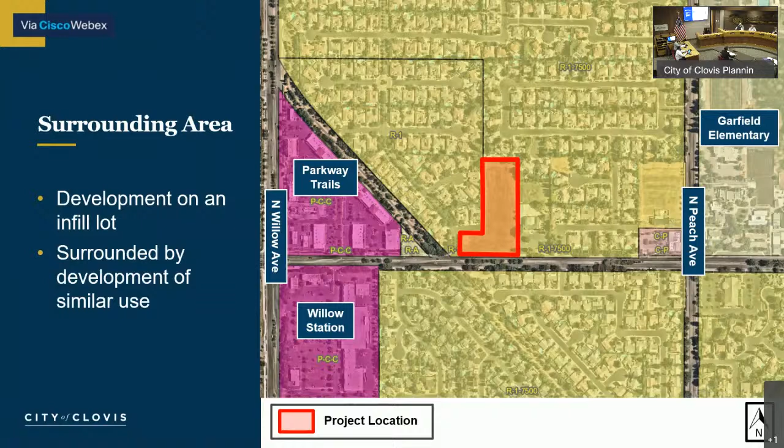The subject property is zoned R1 7500 with a general plan land use designation of low density residential. The proposal of a 10-lot subdivision on the 3.55 acres would result in a density of 2.81 dwelling units per acre. The general plan allows for up to 14 lots to be on this site, so the proposed use is well within the permitted density range and even at the lower end of it.

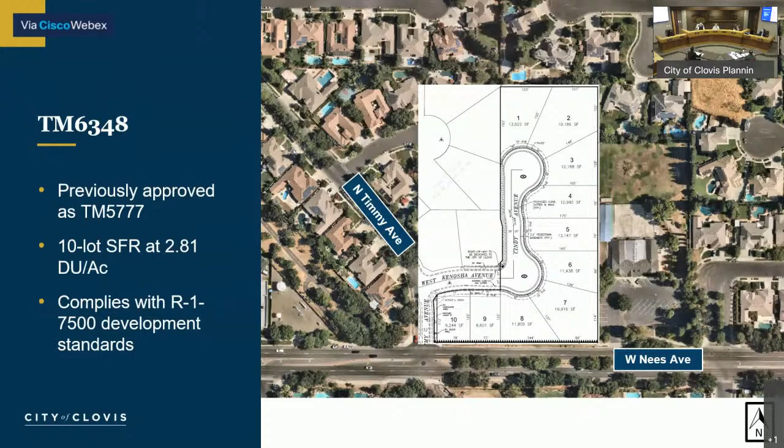Now, would they have to replant those trees somewhere on the property if they were to move them or remove them? That is correct. They would have to get a tree removal permit to remove any trees on the site, and that includes an arborist report and a replanting plan. And it is their intention to save what they can, but for what they do have to remove, they will need a permit. And the palm trees will fall under that same? That is correct. Okay. Is there any way to remove the palm trees from it? I would hate to see them have to put the palm trees somewhere. Okay. Any other questions? Okay, we'll now open it up to the floor.

And the applicant, would you like to say something? No, let them turn it on there for you. There we go. Am I on now? Yes, you are. Good evening, Mr. Chairman and members of the commission.

My name is Gary McDonald, and we're very pleased to be able to acquire this site. In the past, we've built several hundred houses in Clovis, and they've not been as high quality as we plan on building here. The homes are going to be larger, and the lots are large enough in some cases to have accessory dwelling units. So we'll probably be making applications for accessory dwelling units on some of these lots. We are in agreement with the staff's report and ask that you approve this for us. We're ready to move forward as quickly as possible to build these out.

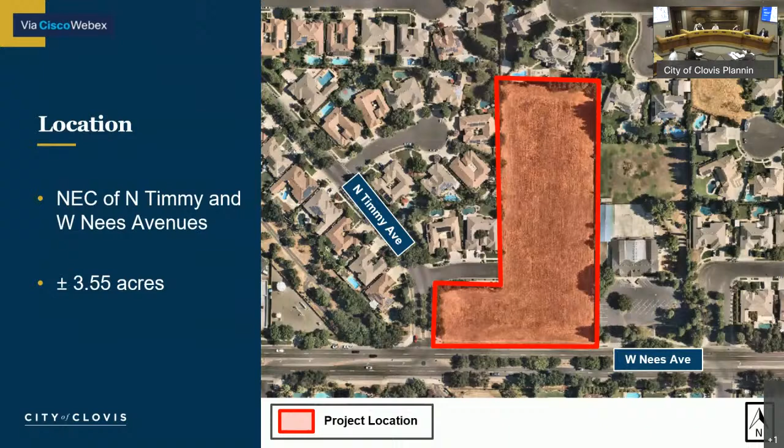Item number 3, consider items associated with plus or minus 23 acres of land located at the northeast corner of Nees and Minnewawa Avenue. Jeremy Vander Linden and Brad Bell, the Well Church applicant's representative, the Well Community Church, a California nonprofit religious corporation owner. Item A is consider approval of a request to approve environmental findings of a mitigated negative declaration for rezone 2020-005 and conditional use permit 2020-006.

Item B, consider approval of R 2020-005, a request to rezone plus or minus 23 acres from the RA single-family residential very low density zone district to the Clovis R1 7500 single-family residential low density zone district. Item C is consider approval of conditional use permit 2020-006, a request to approve a conditional use permit for a church use. Staff? Good evening, Chair Hinkle, members of the Commission.

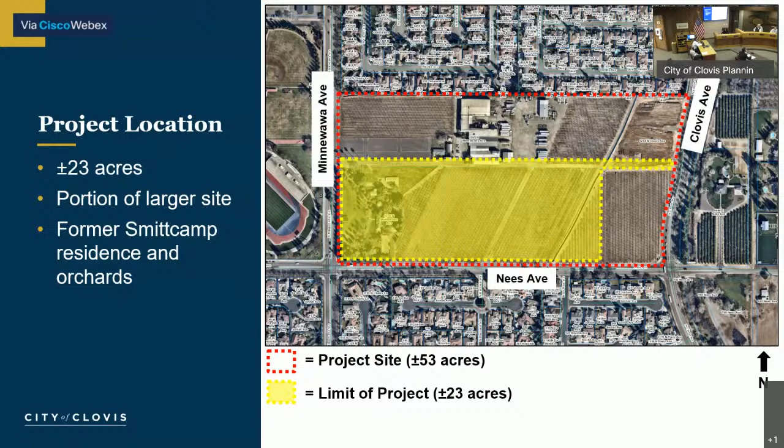So the project is located on the northeast corner of Minnewawa and Nees Avenue, as you see here. The project itself would occupy an approximate 23-acre portion of a larger site. The larger site you can see is denoted in red. It's about 53 acres total, but the project itself for consideration tonight is about 23 acres of that. A lot of you may know it as the former Smittcamp residence and or orchards, so that's where it's going to be.

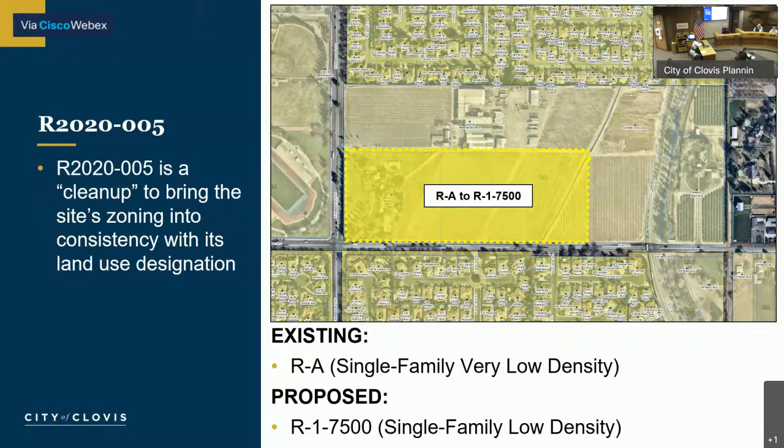Rezone 2020-005 is a rezone request to go from the RA, single-family very low density, to R1 7500. Really, this is just a cleanup action. The current land use designation here is low-density residential, and to bring the zoning into consistency as part of this project, that's the purpose of that. The reason why R1 7500 was selected is that's just what's surrounding in the other areas, so that's what's consistent. But obviously, this is for a church use, so that's just a cleanup action.

CUP 2020-006 is for a church use. Church services would occur on Sundays at 9, 11, and 5, as well as weeknight services Monday, Wednesday, and Thursdays from about 6 to 8:30, depending on the day. Childcare services would be provided only during church events and services.

So I have a site plan on the next couple of slides that will show where the daycare or childcare center is. That's not intended to be any kind of other childcare. It's only open during service events. Other events included in the CUP would be typical of churches, weddings, funeral services, Bible studies, and other events that you might see at a church-type facility. They will also include recreational fields for their use.

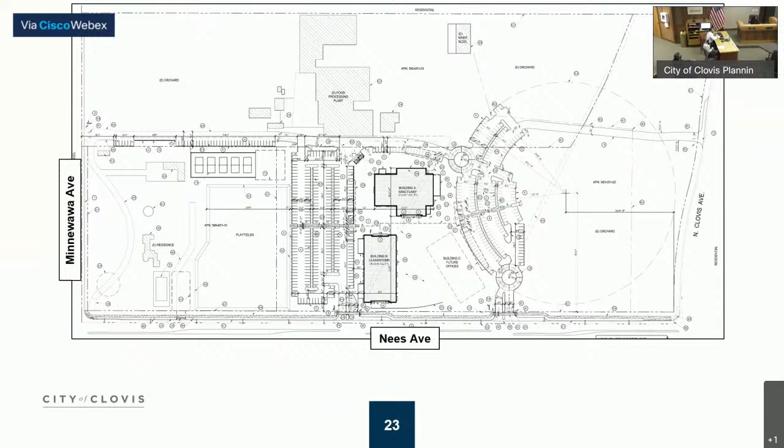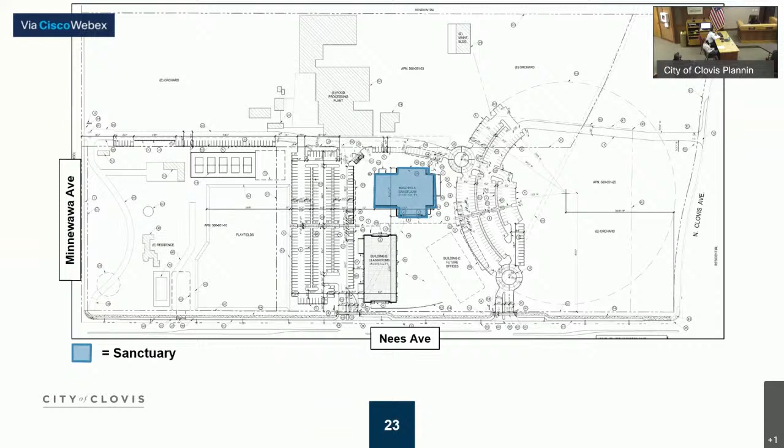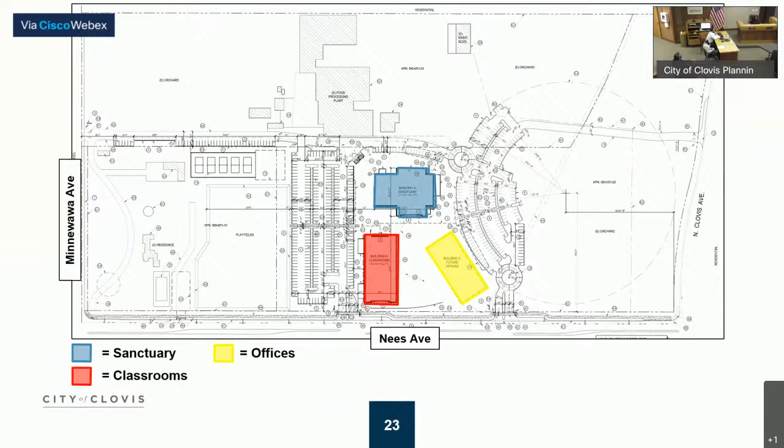So this is the site plan that's being proposed. As you can see, most of the structures are located kind of in between Minnewawa and Clovis, pretty equidistant towards the Nees Avenue side. As you can see here, indicated in blue, that's where the main sanctuary would be, where they hold the services. The classrooms that I was just talking about would be here, where you see in red, as well as a future office building for office and administrative related duties associated with the church. And then there would also be an area of play fields and outdoor sports courts also for use by the church.

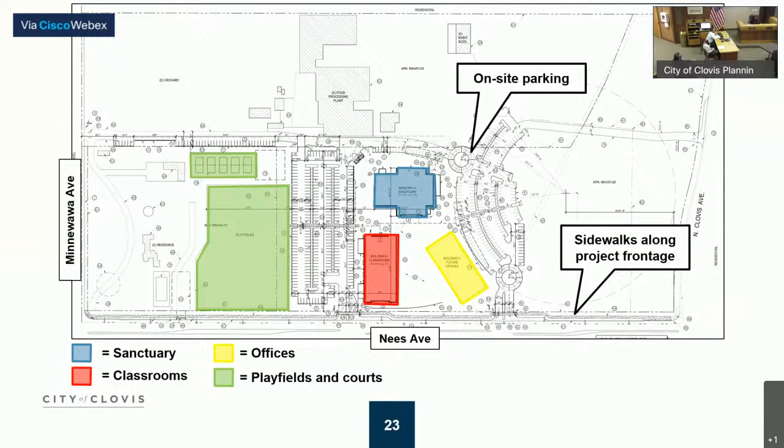Other features of note would be that sidewalks would be included along the project frontage. That includes Minnewawa, Nees, and Clovis Avenue. If you've been out there recently, or you know the site, you know there's no sidewalks or anything right now. It's unimproved. So as part of this project, those would be installed. There would also be on-site parking. As you can see here, it's pretty much wrapped on both sides of the buildings. There'd be approximately 515 vehicle spaces as part of this project.

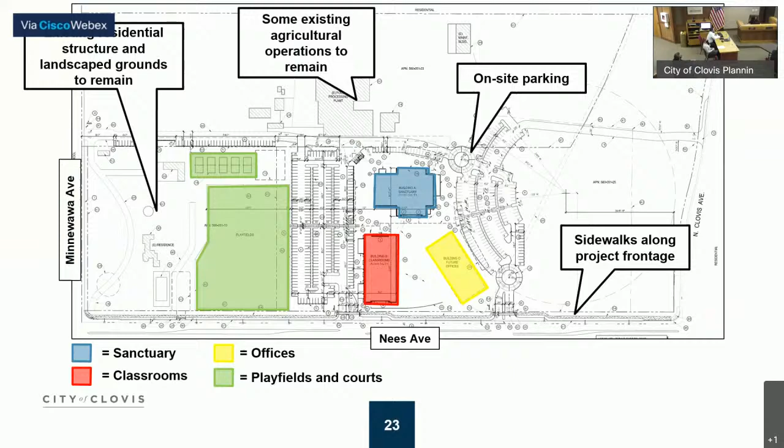And then it is worth noting, although it's not part of the CUP, there would be some existing agricultural operations remaining as part of the former use of the packing and frozen food storage tied to the previous owners. And then I also did want to mention where most people are familiar with the residence and the grass area and the trees there. That would remain as part of this project. There are no plans to modify that particular area of the project site.

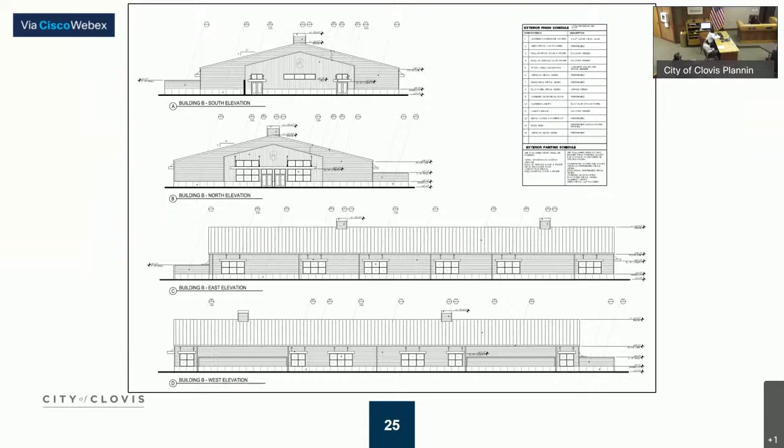So we did receive 2 comments. One was a letter, one was a phone call. Primary concerns were just a lot of questions on the noise and the traffic circulation of the area. Staff did meet with one of those neighbors in person to address their questions and concerns. So we met with him, and then I had also spoken to one of the neighbors along the north property line a couple of weeks ago.

As it relates to noise and traffic, most services would be held indoors. However, some would occur outdoors if there's weddings or kind of events typical of churches, and to enjoy the grounds there. Some of those events would be outdoors. Any uses would be required to be held to the noise standards included in the municipal code in terms of hours of when noise could occur as far as decibel levels.

As it relates to circulation, the site does have an adequate amount of traffic, and on the next slide I'll show you there's going to be a total of 5 points of ingress and egress, so it really is going to be designed to disperse traffic and get people onto the site as quickly and efficiently as possible for where they're located. And then it's also worth noting that Nees Avenue will be widened as part of a community investment program, a city project. The north side of Nees will have an additional lane added, so that will also help with the circulation in the area.

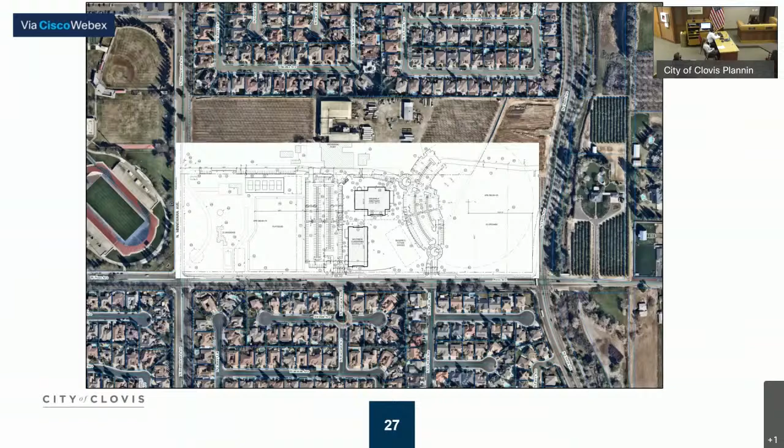So as it relates to noise, one thing I wanted to point out is really the distance. From where the project is going to be, it's approximately 425 feet, if not greater, probably from where those noise events would occur, if there's weddings outdoors or music or what have you. You're talking about at least 425 feet away, which is a pretty good distance.

On the south side, it would be approximately 200 feet away, depending. I took that measurement just based on where the block wall was on the south side to the lawn area of where the residence is. So just to give you an idea in terms of noise, and obviously the further away you are, the noise will drop off as you get further away.

As it relates to traffic, these red arrows indicate the points of ingress and egress and the turning movements that would be allowed. So again, there are 5 points, and this is really designed to help people get onto the site as quickly as possible during services, as well as allow people to leave the site. So there will be an entry and exit along Minnewawa and Clovis Avenues, as well as 3 points of ingress and egress along these. It's a little hard to see because of the site plan, but there will actually be dedicated right turn pockets along these.

That way they can have kind of a decel lane to get into the driveway, and the intent there is that there'd be sufficient room so that there wouldn't be any queuing or too much backup along Nees, if at all. So with that, staff recommends the Planning Commission consider approval of the mitigated negative declaration, consider approval of the rezone 2020-005, as well as CUP 2020-006. That concludes staff's presentation, and I know the applicant is here to answer any questions as well as a member of their traffic team.

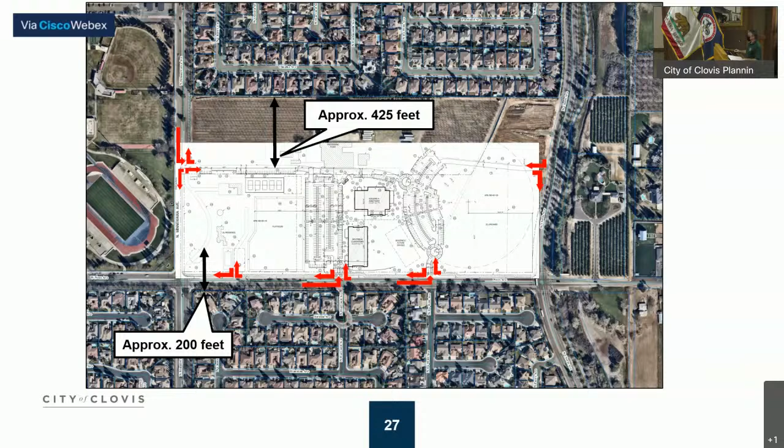No, I appreciate that. And from my perspective, I'm not really that concerned about the churchgoers that are exiting. I'm concerned more about the people that travel on Minnewawa and think that they're going to have the right of way, exclusive of anyone coming out of there. So it just seems to me it would be a safer move to just keep it right in, right out, all the way around.

And it doesn't seem like that would be a terrible inconvenience for the churchgoers. Now perhaps you can mitigate that, like you said, with cones, but I would be deeply hurt if someone got injured in a traffic collision there because someone was trying to speed to beat the next light and have a churchgoer come out in their way.

In terms of safety, I can't say that the traffic study really digs deeply into safety. We look at delays, but in terms of sight distance and speeds that people are traveling, that's a slightly different design issue, and essentially it would be maintaining what's existing. So I don't want to imply that I'm saying it's completely safe, because it depends on people's behaviors. But it relies upon sight distance and adequate design, so that can all be checked too. Okay. All right. Thank you.

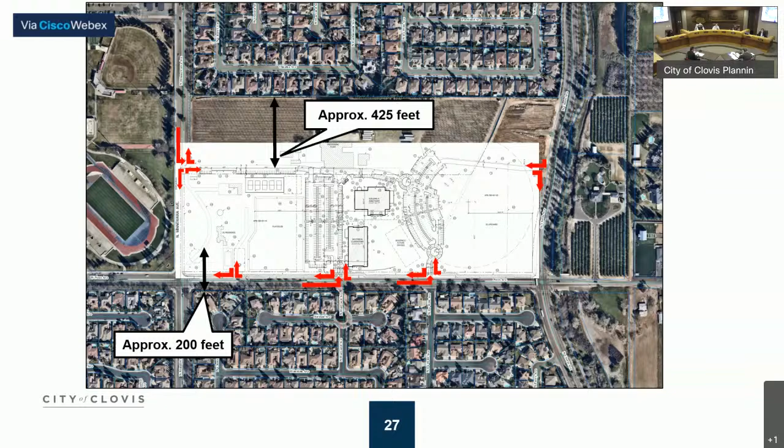Yes. Chair Hinkle? Yes. And I'll make a motion to approve CUP 2020-006 with the changing of the hours from 7 a.m. to 10 p.m., 7 days a week. Does that work? Operational hours? I'll second that motion. Motion by Commissioner Hatcher, second by Commissioner Bedstead, to approve conditional use permit 2020-006 with the modification to the hours of operation for outdoor activity from 7 a.m. to 10 p.m. Commissioner Antuna? Yes. Commissioner Bedstead? Yes. Commissioner Cunningham? Yes. Commissioner Hatcher? Yes. Chair Hinkle? Yes. Okay, thank you.

Move to old business. Is there any old business? See none? Okay. New business, move to cancel Thursday, April 15th, 2021 Planning Commission meeting. Staff? The senior planner. Good evening, Chair Hinkle, members of the commission. When this agenda was published, we had no items ready to go for April. However, since publication of this, we received 2 items that we would like to take to the April Planning Commission. So we were originally going to request to cancel it, but we'd actually like to request to cancel the cancellation and actually hold the April PC meeting, if so desired.